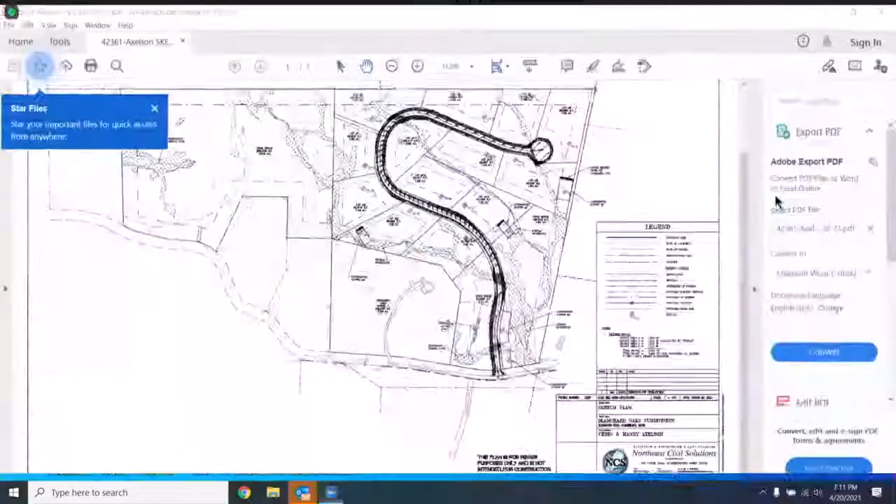Essentially, like Carla was saying, this is more of a redundant meeting for this situation because we were at the workshop last month. The plan hasn't really changed at all since then, but I can give you an update on the open space - further discussion with the applicant, we are leaning towards keeping the open space as homeowner association land, rather than trying to turn it over to the town. That's where we'll be headed for our preliminary submission for next month's meeting.

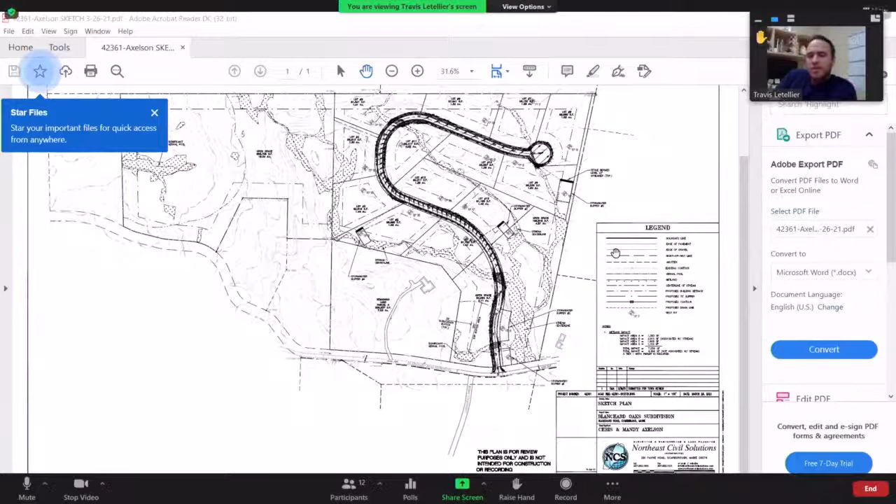But other than that, it's pretty much exactly the same as we were talking about last month. In addition, since the workshop, Chris and Mandy Axelson have purchased the property - have actually gone ahead with the purchase. So they do own it now, and will be coming in under the LLC they purchased it under - Schooner Ventures will be the applicant for the preliminary plan going forward.

So other than that, I can open up to any questions if you want to talk about any of the potential waivers we might be asking for, or I can answer any questions you might have about the possible subdivision. Okay, thank you, Travis. Does anyone have a question at this time?

Aside from the ownership of the open space, would the applicant be open to trails and public access to that space?

They're looking to develop the road and then sell the lots, so that will be up to the future homeowners association. I can't speak for the future owners of these lots, but I can't see why not, though I don't know how to answer that for sure.

That would be good information to have at the next step. Any other questions or comments? No. Thank you, Travis, thank you very much.

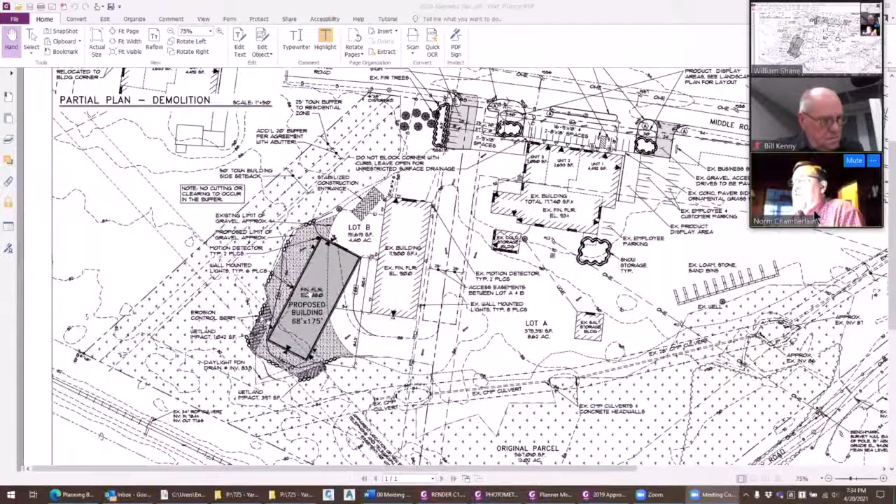We have modified that slightly. We've moved the building outside of what appears to be a New England telephone easement, and in doing so it kind of pushed us into the wetlands a little bit. But it did reduce the amount of impervious surface by 419 square feet. So the development before you is a little less aggressive than it was 2 years ago.

With the wetland impacts, we have some here and some there. These were actually done 2 years ago, but nobody realized there was this contour line that kind of lined up with the edge of gravel. So we're going to the Army Corps of Engineers with a self-verification notification to account for these impacts, which are on the order of a couple thousand square feet. They're under the 4,300 square feet allowed by DEP.

We are proposing some lighting on the building. This was approved 2 years ago, except for the one on this side. We've developed this photometric plan - these are wall-mounted LED lights that are full cutoff, so they're only spreading light out a little bit. This is a 0.5 foot candle line out here. In between the buildings we have a fair amount, but on the ends it's just security. Even though we have an egress door on this side, we're not proposing a light over this door.

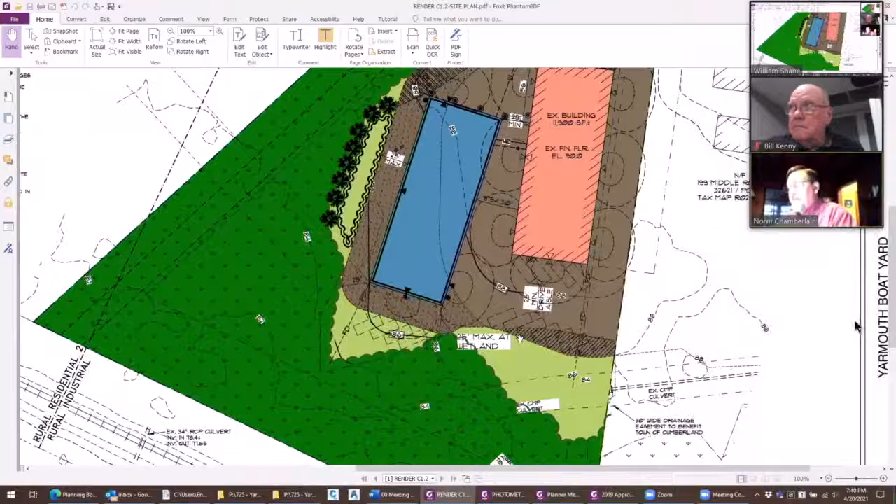Norman, Steve, regarding the outdoor boat storage, I think there were 15 spaces for 25-foot maximum length boats. Is that shown on the diagram as those lines in the back? If I can show my screen, the plan sent to the board was a markup meant to look more like this. At the ends of the two buildings, we're showing 4 spaces over here, 4 over there, and then others. So we have a total of 15 spaces down at this end of the buildings. That's where the outside storage would occur.

Thank you. Other questions? I'd like to make a statement before we go to the public hearing. Bill, go ahead. I live on Friar Lane, and I'm outside the area within the notification zone for abutters by one house.

I've been getting questions from people on Friar Lane because I'm in the association and they know I'm on the board. My reply has been that I can't comment because I'm on the board. I don't think I have a conflict, but I wanted to bring that out there. I think I can judge accordingly. Thank you, Bill.

Mr. Chairman, where Mr. Kenny presented you with a potential conflict, the board has to vote on whether he has a conflict, not you. So I think it's appropriate to take a quick vote just to make sure the board is comfortable with that. Any discussion before we vote on whether Bill has a conflict?

I apologize, I was distracted. Could you repeat that, Bill? Yes, I live one house outside of the area required to be notified as abutters, which happens to be on Friar Lane.

There's an association with that development, and I've seen email traffic because of it. I haven't responded to the emails, and people who've approached me on my walks have asked about it. I told them I can't comment because I'm on the planning board and it wouldn't be appropriate. So I don't think I have a conflict, but I wanted to make that known to the people on Friar Lane and in that area, and also to the board.

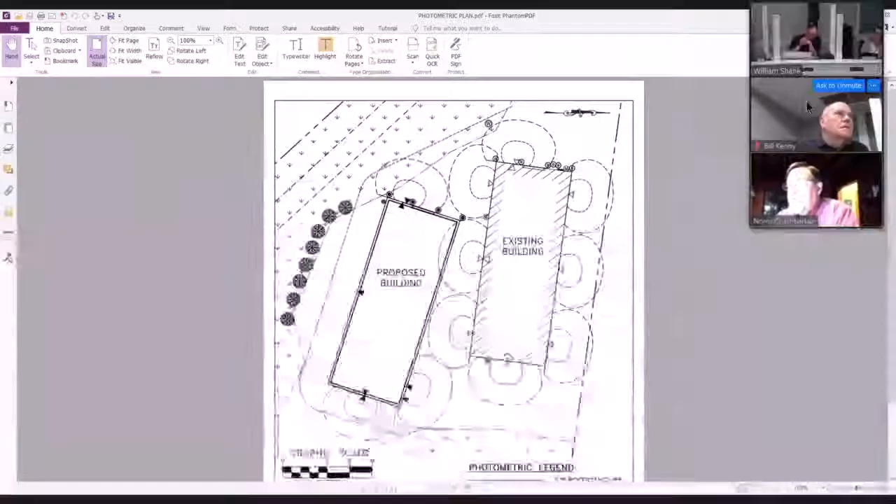If it's on the left, I'm not terribly concerned if it's behind the building. Well, I think I'm looking at a map that shows your house - so basically the corner of the new building sort of points at your house. So the front corner would be on the street side of the building, on the end, and actually there's an overhead door there where they access the inside of the building.

So security in this area is obviously important. It's hard for me to know now if that's going to be an issue, because they have moved the building forward some, so maybe it doesn't affect me.

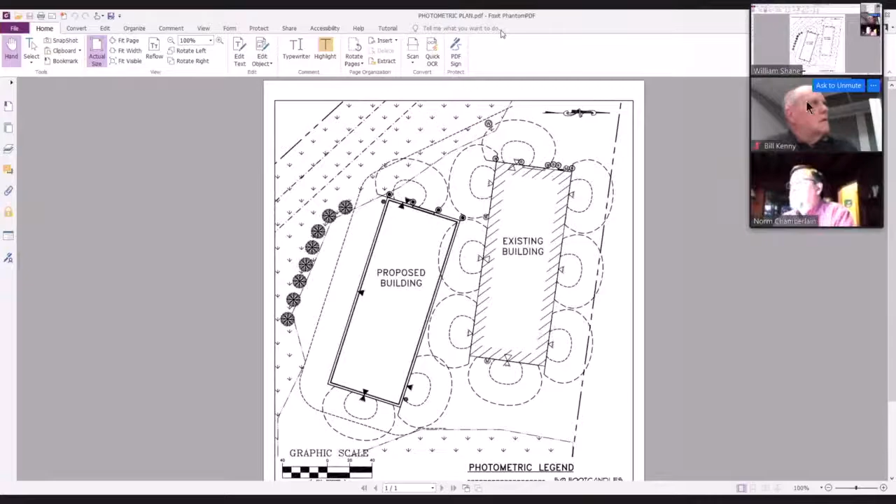My question is, why do we - Steve Arnold, I don't mind putting a motion detector on the back side of the building. The front side, the street side, they're all low level, they face down. There's a personnel door, so I'd probably prefer to keep the low level on the street side intact. I'll put a motion detector on the back side of the building.

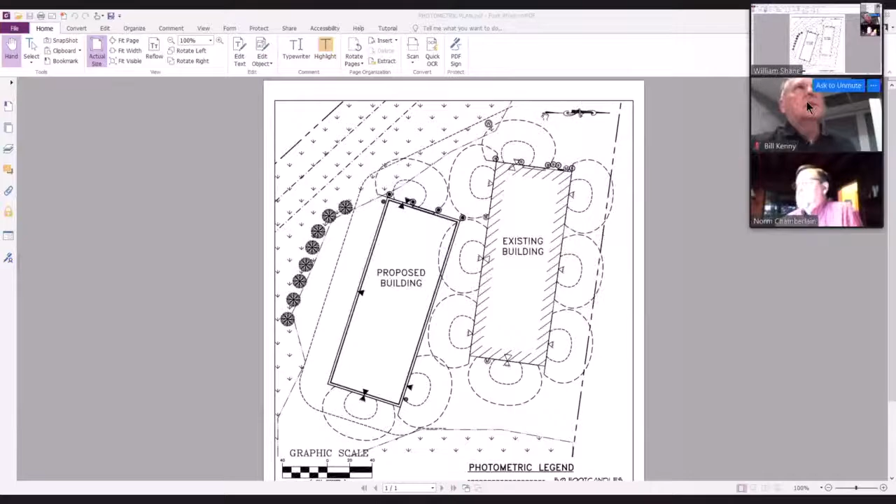And I do want to apologize for those lights being on - I knew there was a problem when I first heard about it. I didn't think it was the whole winter, but it was 7 months. I apologize, they malfunctioned - they were supposed to be motion detectors and they never kicked off. So I do apologize for that. We weren't trying to keep you up at night.

Okay, so just those plantings you put in a couple years ago, or are you cutting into the 25-foot buffer of trees you have now from my property? We're looking at enhancing the buffer between the proposed building and your house, and also along Middle Road, to thicken that so we screen the little buildings from the road, and plant some more in front of that too.

Yeah, I mean, I don't think there's much I can do. I'm just doing what I tried to do two years ago, to give myself a little protection from this development. As board members, we are interested in making sure the ordinance is followed, and in trying to resolve any issues that people are willing to resolve easily.

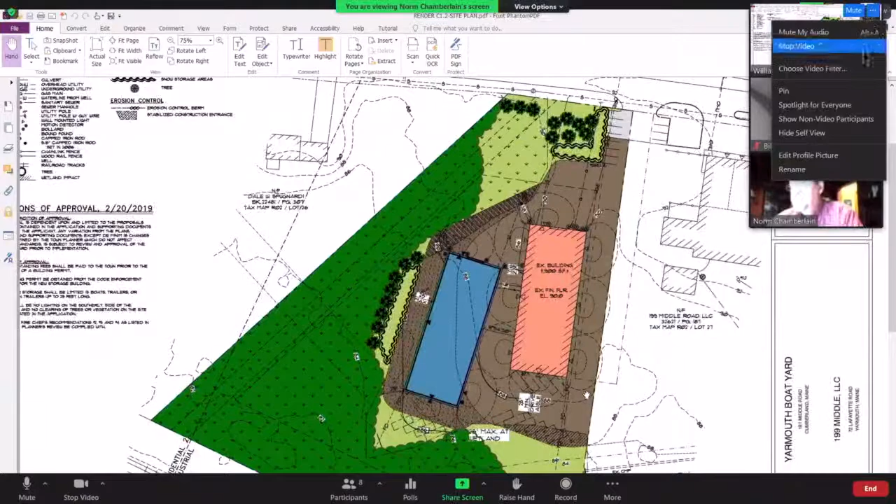We do have a lot of boats stored outside, about 60 boats, and that gets cut back to 15. So you won't have a lot of traffic bringing 60 boats up. In the new building, we store an average of 30-32 boats depending on length. We come in the fall, starting late September, and we're done by November 1st or 15th filling the buildings, then we're gone. I might have one employee go up there to do some cleaning on the boats, but it'll be a ghost town from mid-November until about April 15th when we take all the boats out.

Okay, I was just curious because I didn't really know anything about it. I'm fine, I just wanted a little information. No worries, thank you. Good, thank you very much.

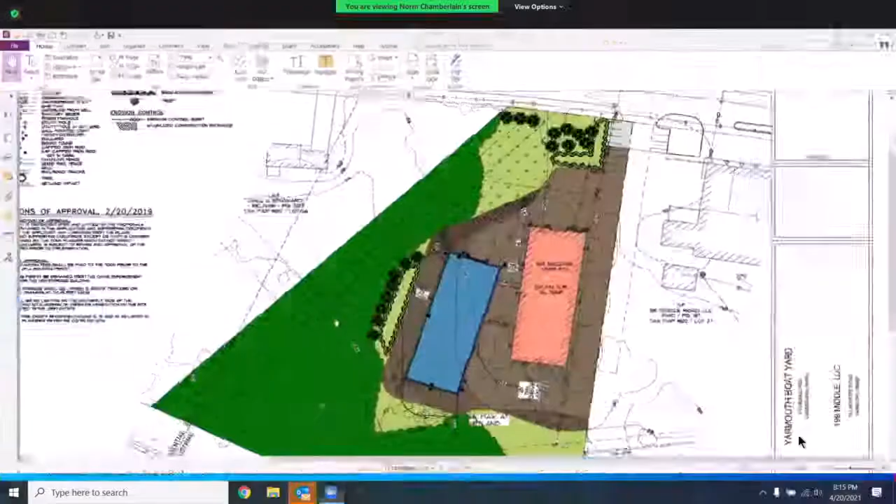When we talk about stormwater, remember our ordinances deal with the rate of runoff on a project, not the volume or the quantity. That's something I've talked to this board about a lot of times. If we could zoom in a little bit so you can see the corner of the house and see what those contours are...

You'll notice the contour number 90, which is 90 feet of elevation, and as you go back toward the lot, in the rear, it's almost an 8-foot drop off from the house toward the back of the lot. That drainage was a huge problem area when Craig Wright came to us to develop the original lot, and he worked with the town to give us an entire easement across the back, which has improved that drainage all the way up to Middle Road.

The problem with drainage town-wide is that over the course of decades, development has had some impact on the groundwater table, because the more volume you put in, if it can't get exhausted quickly, it tends to saturate the ground and bring up the water table. That's what we see in a lot of areas.

When you look at this drawing, while it's a pretty drawing, I look at the green and see little bird prints in it - that's all wetlands. I'd tell you it didn't stop at the property line in the past; it probably extended all the way to Middle Road at one time. Those soils are scantic soils, which aren't great soils - they don't drain very well and can absorb and hold a lot of water.

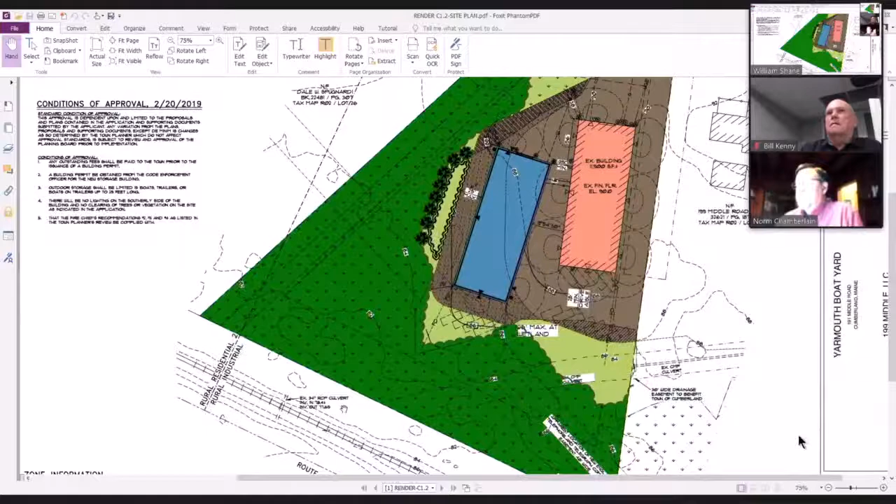So the drainage improvements we saw toward the back really did help, but not to the extent that would lower that water table enough for residents to get relief. That's going to be an issue town-wide.

From a stormwater standpoint, everything drains to the back of the lot. So it's difficult for me to say a stormwater analysis would tell you much, other than maybe it tweaked up 0.1 or 0.2 cubic feet per second, which isn't going to make much difference to any of these homes.

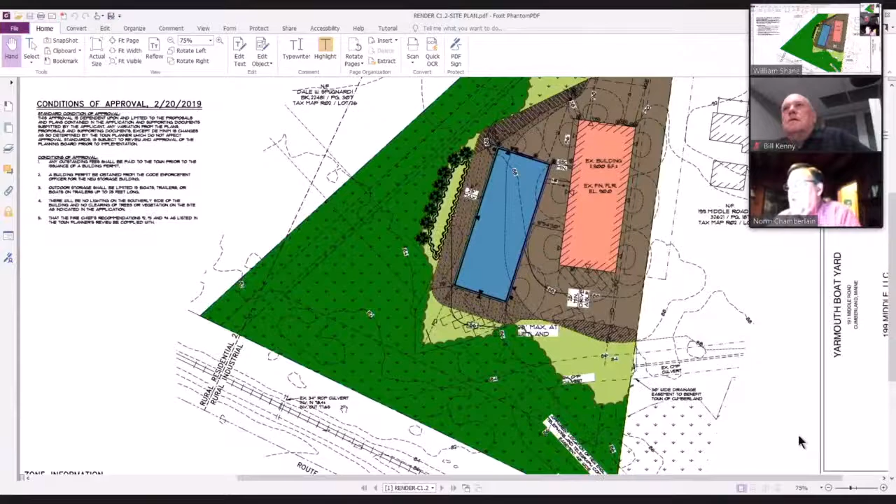Let me ask you this, Bill - not being an engineer, the literature we have, the proposal talks about drainage analysis. I know from owning homes that, to me, maybe ultimately it's stormwater, but drainage doesn't have to be related to stormwater. So in your mind, is there no distinction between a drainage analysis to see if water flow direction could be improved versus a general stormwater analysis?

We're talking about two types of water: groundwater under the surface, and stormwater on the surface created by runoff, which is typically what we control. If we had some type of retention or detention pond very close to the neighbor's property, I would have said there might be a possibility that water is being held back and raising the water table near his foundation, causing problems.

But you're seeing sheet flow basically all across there, and you've got homes surrounded by wetlands retaining basically 10 times the water of their weight. It's amazing how much water those wetlands will retain. So no matter what we do on this property, outside of trying to drain the wetlands - which would require deep pumps and would be semi-illegal - we really couldn't do a lot more.

Jason: So you had to move the building toward the east, towards the road, because of the telephone company easement, is that right? That's correct. And so the building stayed the same size, so you're changing kind of where you impede onto the wetlands, right? Yes, we are impeding on the wetlands here because we're trying to make it so that they can bring a truck in and get a boat into the building. But other than that, most of the development is up in the uplands that are on the site.

And toward the east, how far did the building move? Let's see, this was the approval in 2019. So basically all we did was slide the building up this way so that this corner is sitting on that easement line. How many feet? Looks like it's about... Looks like it's about 20 feet closer to the building.

So if you kept the same slopes and everything, you're moving that into the wetlands a little bit more, everything got pushed towards the east, is that right? This isn't 20 feet. This is probably only about 10 feet where we're impacting the wetlands. So it's right up along here. There's an existing well there. So we just looked at how can we make access into the front of the building better, plus the town requested a 25-foot fire truck path around the building.

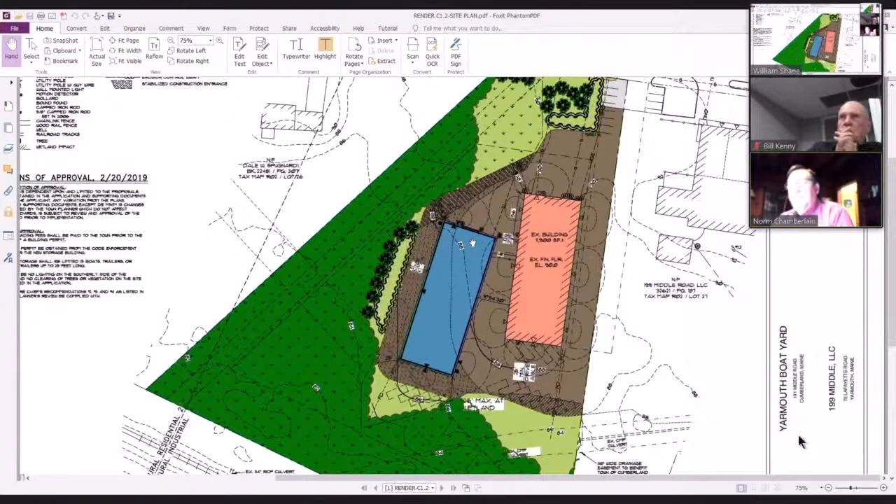I think in general, I'm not in favor of waiving the stormwater study, given what Dale has said, and I know that's unfortunate for the applicant, but especially where the building has been moved towards the east, I kind of think it's appropriate to take a look at that.

Okay, Amanda? I would agree, that was going to be my comment. It doesn't seem like it's going to cause too much harm to the applicant's process, so why not just do it? That way we have the updated numbers.

Okay, thank you. I do have a question. Can we limit the hours of operation formally? Can we put it in there as a condition of approval that they can only bring in boats and remove boats during a certain period of time of the day? During construction. Not for operating the business? Okay, thank you.

Other comments? Ann: Yeah, well, I don't think that we should change the conditions that were agreed to in 2019 to protect the neighbor from light spillage and cutting down vegetation. I don't think we should allow that to be changed, but I don't get the impression they're doing that. It sounds like he will still have no lights on that side and the vegetation will not be cut down. On the stormwater, I think it might be a good move to have an update to that because there is a lot of concern about it, and if it's not that difficult, then perhaps that would be a good thing to do.

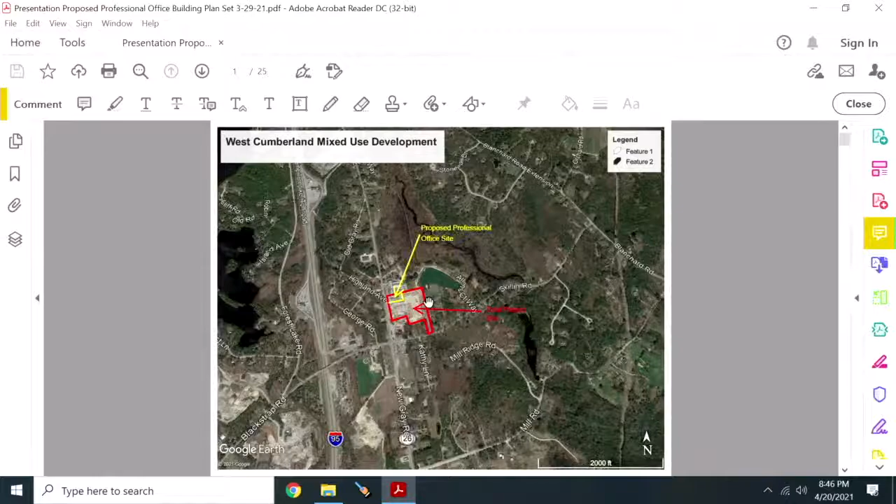I have quite a bit of familiarity with the site. I lease office space in that Casco Systems building, so I've been there for 2 years now, so I have a pretty good feel for what's happening on Route 100 and how this building functions.

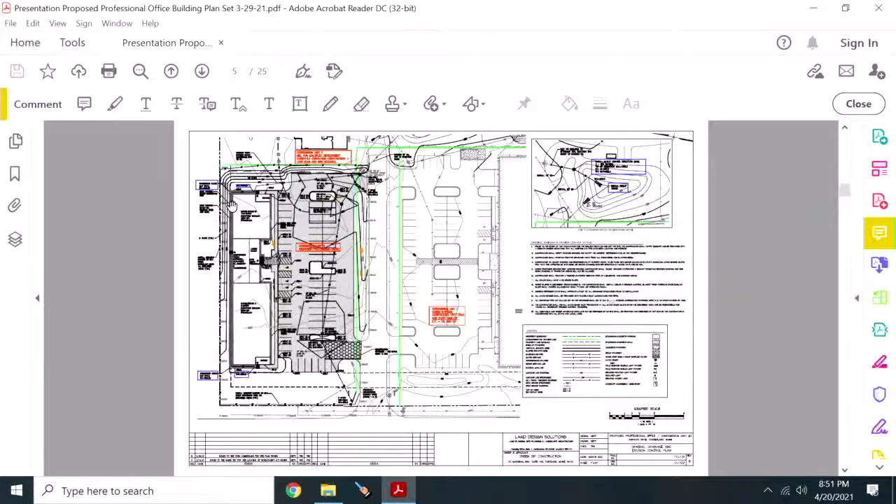This is our grading, drainage, and erosion control plan. I have highlighted in blue the changes made in response to the Sevee and Maher peer review.

Let me flip back to this shot. Our site was involved in the stormwater permit, and the stormwater BMP's ponds were over in this area.

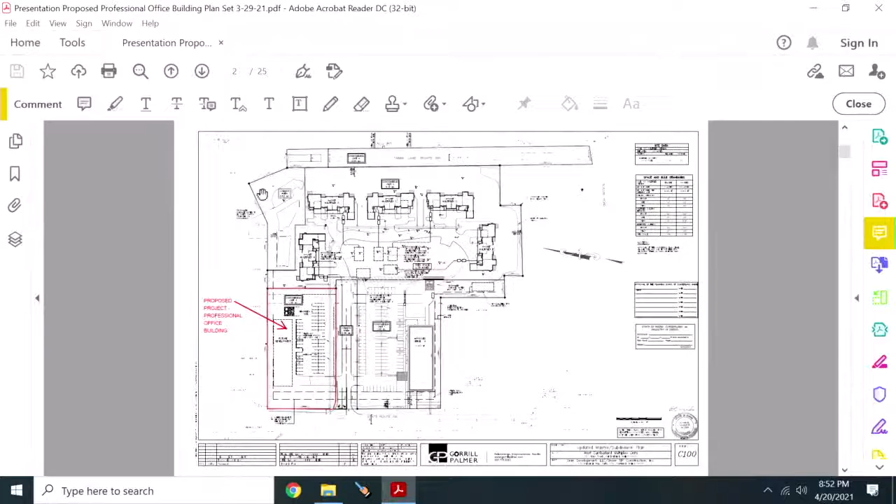Knowing this was happening a year or so ago, when the multiplex project was going through the permitting process, we designed a detention pond to go over in this green space, knowing we were going to have to do something with the stormwater. We talked about that with DEP, and we actually incorporated and constructed most of that in the multiplex construction, so we were looking ahead and getting prepared for that.

One of the comments from Sevee & Maher was that we show the detention area right up here, but we weren't showing all the information they would like to see. We have an outlet control structure and some riprap aprons on the inlets and outlets, so we are now showing that. We're also showing little inverts and cleanouts on our under drain, our roof drip line filter under drain, which we've incorporated into our plan set.

This is our utility plan. This little gray rectangle is an engineered septic system, because our system is over 2,000 gallons per day. It's probably a little larger than we need, but we wanted to make sure we had everything we needed so you wouldn't ever have to go back and enlarge that system.

The plans were submitted in your package, done by Terradyn Engineering. The red outline is the nitrate plume, and there was a hydrologic study done by Mark Cenci, just to make sure we were all within our requirements.

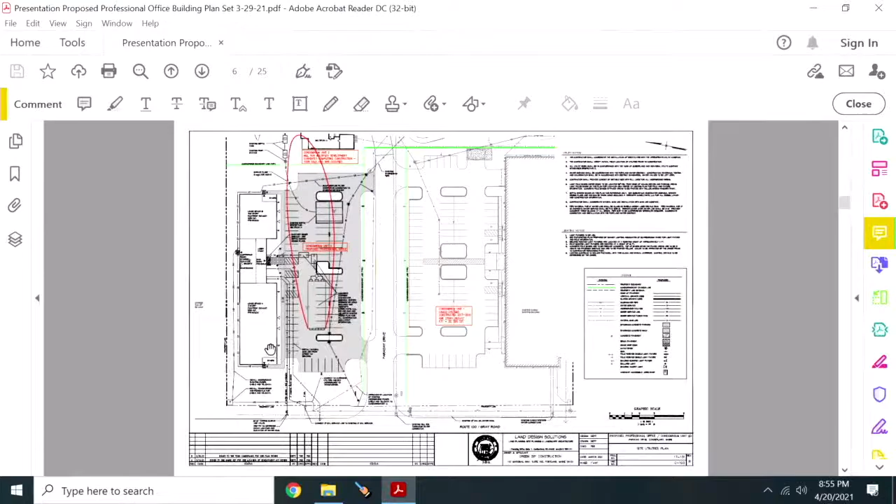Landscape plan - we've mirrored what was done at the Casco Systems building with street tree plantings along here. These are clump river birch, mimicking the theme in front of Casco. We have some evergreen trees on the ends, but just a large shrub line along the boundary. We didn't want to have anything too heavy there.

The building is approximately 18 feet from that line, and if you have an office space along that line with a window, and you end up with an evergreen tree 18 feet away, we'd rather have some daylight and a view than blocking that. We have a nice little courtyard area in the front with decorative entrance pavement and some other plantings.

Staff comments were concerned about beefing up some of the planting in the front. We've expanded a plant bed right here, and we've added some benches along the street island. We also added a bench over here for folks who want to come out of the office at lunchtime or whenever and sit around.

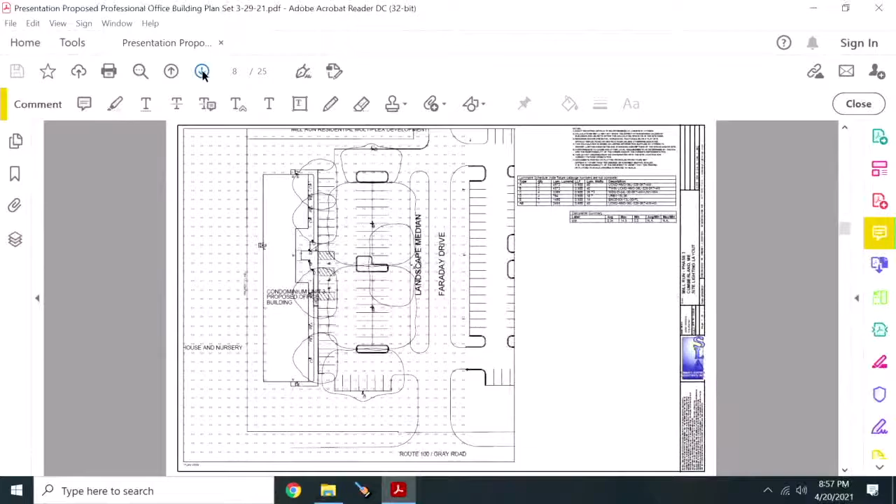Photometric plan using the same sort of lighting as what's used on Faraday Drive and the Casco Systems building, a gooseneck decorative fixture with an LED downlight. We also have some decorative lights on the building, and a couple bollard lights up here by the walk.

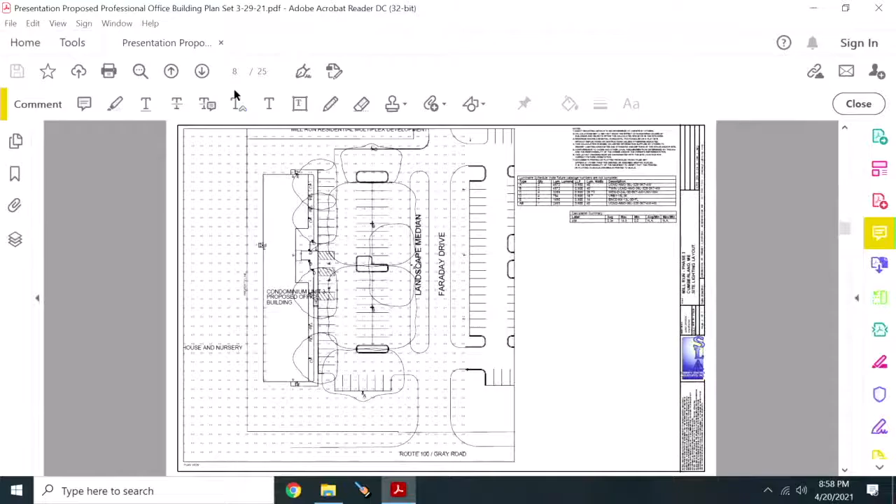For these next building plans, I'm going to ask Mike Hays, the building architect with Grant Hays, to come up, and we'll walk through the building together, starting with the floor space.

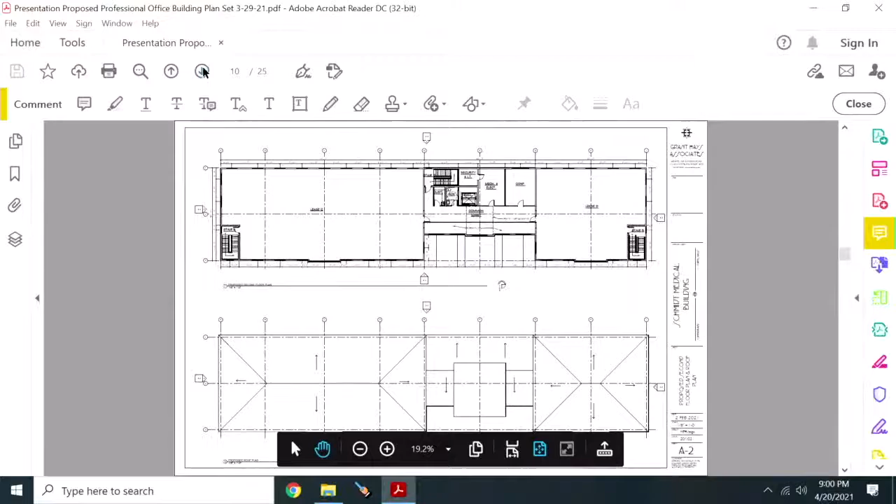I want to go on to the elevations. So these are the exterior elevations of the buildings. We've tried to keep in mind the Route 100 design guidelines for that.

Trying to replicate classic New England style. The two end buildings that you see with the hip roofs have some classic traditional forms that we've given a little bit of a modern nod to. The central part of each of those lease buildings has a different window configuration to give it a little bit of a focal element and create some symmetry on both sides.

The middle portion, which is the common area, is recessed in to create that courtyard and draw more focused attention to that as being the main entrance and provide some very strong wayfinding visuals on the site.

The center is the main entrance. It has a canopy, and then the cupola that extends above the roof again provides that more focal clock tower kind of old feel, further drawing your eye and attention to that space as being where you enter the building. The exterior materials: the base of the building has a stone base, a darker color, so it feels well-grounded, a strong base material.

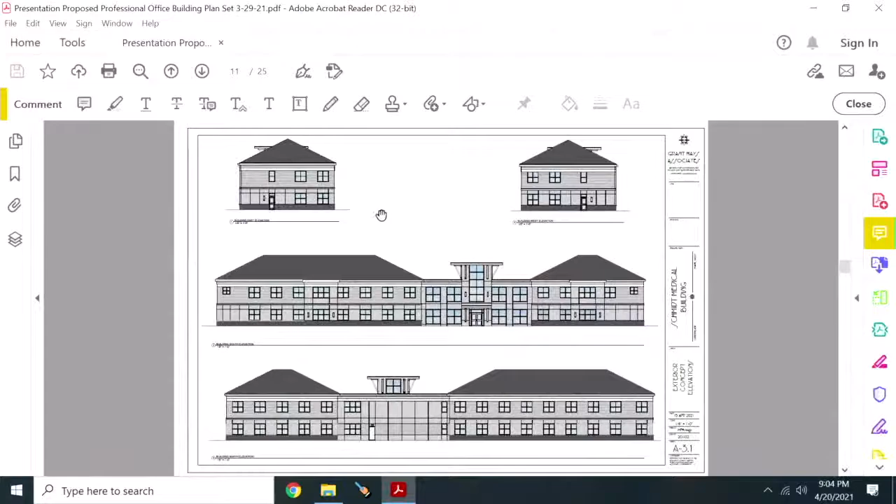Okay, thank you. Carla, question for you: do any design standards apply? Yes, the Route 100 design standards.

Because on page 14, under findings of fact, under M, design and performance standards, Route 100 is listed as one of the four, and then it says none of the above are applicable to this project.

Oh, well, apologize for that. Okay, if you all keep scrolling, you'll see I actually made findings for everything. Based on what I just heard, very much so, compliant with the design standards.

Could either you or Peter show, there was a peer review thing about the walkway that you didn't think was necessary.

Just wanted to point out how people would get there. I thought that was a reasonable answer, where they wouldn't have as shorter distance. Yeah, I neglected to go over that.